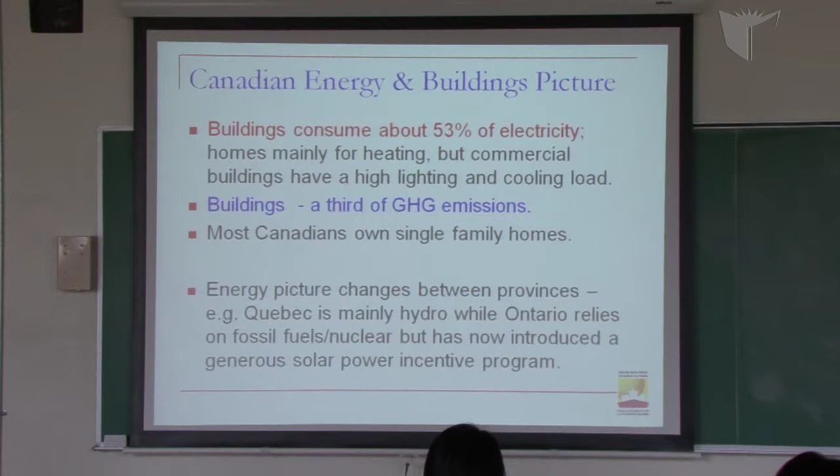When you come up with a new technology, most of the time it is expensive. For it to become cost-effective, you must go into mass production. To go into mass production, you need incentive measures. That's where the government comes in, and the schools and the education aspect to inform the public.

This shows you some of the breakdown of the energy consumption of a typical conventional home, close to 40,000 kilowatt hours per year. Do you know what a kilowatt hour is? Let me see. How many know what a kilowatt hour is? How many don't know?

How many know the difference between energy and power? How many don't know? Okay, that's fine, I'll explain in a very simple way.

Power is instantaneous energy flow, the rate of energy flow. So if I say I have a 50-watt light bulb, it means there is 50 joules per second flowing through that bulb. Some of that energy becomes light, most of it becomes heat.

So if you integrate... those of you that have done integration, have you done integration? Yes? Some of you, okay.

Now, if you plot a power curve and find the area under the curve, that's kilowatt hours. So kilowatt is the unit of power; 1 kilowatt times 1 hour is 1 kilowatt hour. If you have an energy flow of 1 kilowatt over a period of 1 hour, you get 1 kilowatt hour. That's the energy consumed, and you can also express it in joules by multiplying by 3,600 seconds instead of 1 hour.

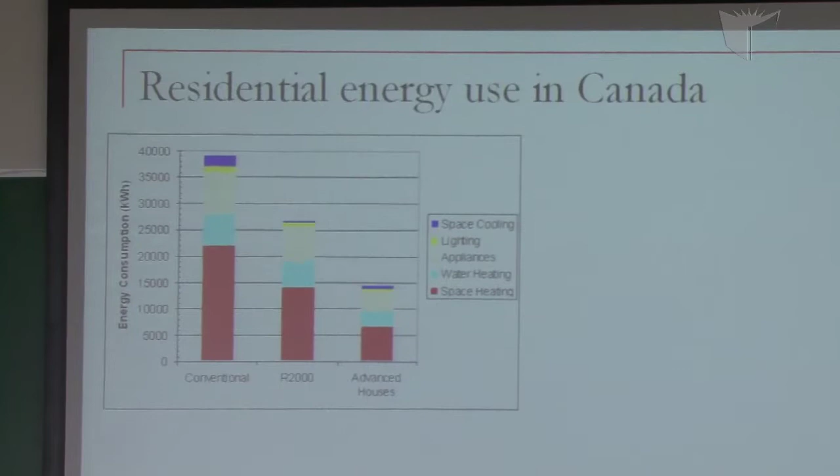There was a program called R2000 by the government to encourage higher insulation levels in houses and adoption of better windows to reduce energy consumption. That was the R2000 program. Houses were built to that standard, and there's a similar one in Quebec called Novoclimat.

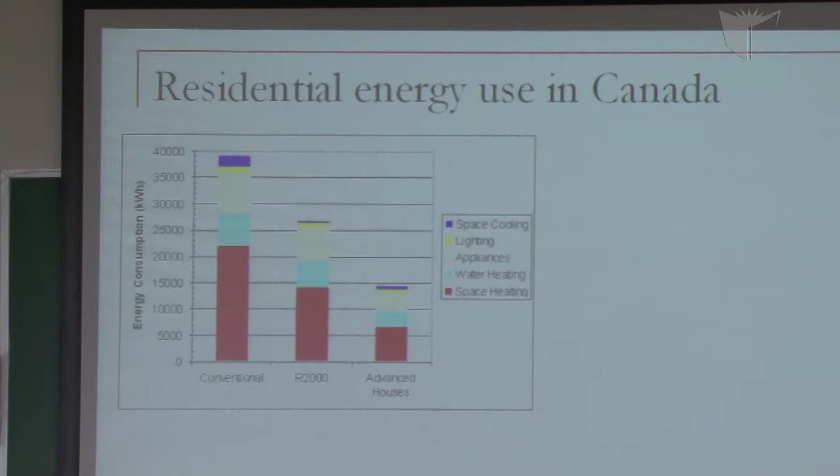Anybody heard of Novoclimat? Anybody heard of R2000? Okay, so it's good that I came here, so now you've heard about it. I guess that's one reason why I came here.

So you have these funny names, and then you have these so-called advanced houses. This was a demonstration program. When the government wants to show new technologies, they do demonstration programs, getting advanced industries and government research laboratories to build new houses with new technologies to demonstrate them. This was in the 90s.

They demonstrated that you could reduce energy consumption almost to 1/3, down to about 14,000 kilowatt hours per year.

So does anybody know how much 1 kilowatt hour costs? How much do you pay Hydro-Quebec for 1 kilowatt hour? Anybody know? Yeah, a few cents, something like 7 cents.

Let's say 10 cents. If this was 40,000 kilowatt hours and you pay 10 cents, how much would it cost a year? $4,000. So it's a significant amount of money.

That's about what you pay to go to... how much do you pay to go to Marianopolis? About that? So it's not an insignificant amount of money, and the cost of energy is rising.

So what's our objective? To bring this down to 0. If you draw a curve there, you bring it down to 0. How do you do that? By doing the kind of things these guys have done in the advanced house, but also by generating energy. So instead of just having positives, which are consumption, you have a negative, which is generation, so it becomes 0. That's the whole idea about net zero energy buildings.

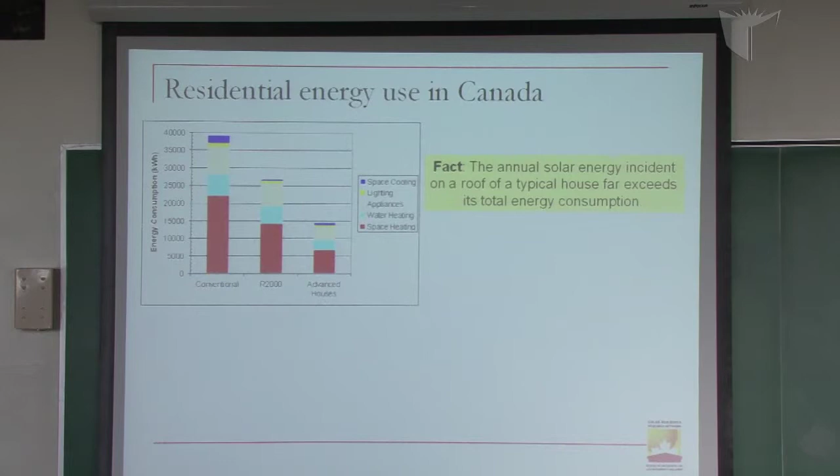Now, here's a fact: the annual solar energy incident on a roof of a typical house is a lot more than its total energy consumption. So the question is, how can we use a lot of that energy to generate electricity and heat so as to get to zero average energy consumption? That's one of the objectives of our research at Concordia and in this research network that I lead.

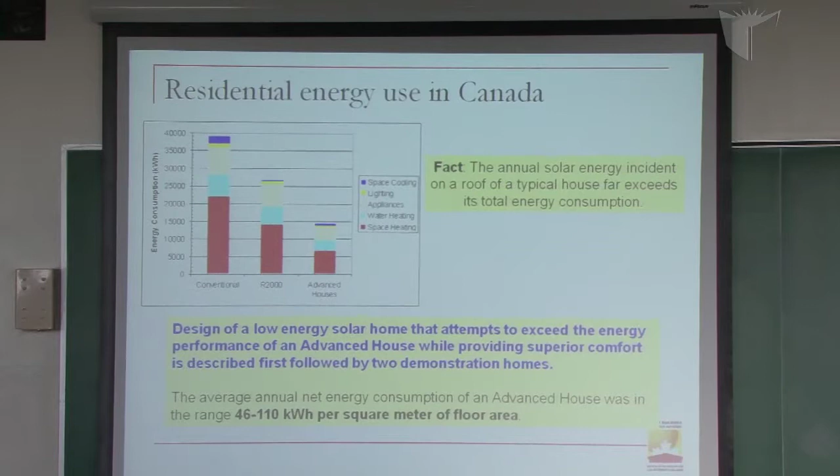The design of a low-energy solar home that attempts to exceed the energy performance of an advanced house will be described a little bit in my presentation. There are some statistics I'm going to talk about.

Now, just a little bit about our network. It's a big network: 11 universities, government labs, utilities such as Hydro-Quebec, architects, engineers, manufacturers. This is a unique Canadian initiative based at Concordia in our department.

Our long-term goal is development of the optimized solar building as an advanced integrated system. Integrated means everything fits together nicely. You don't have things which are oversized, so it becomes cost-effective. It's a combination of high-tech and low-tech. Anybody hear this word? Passive solar, passive houses?

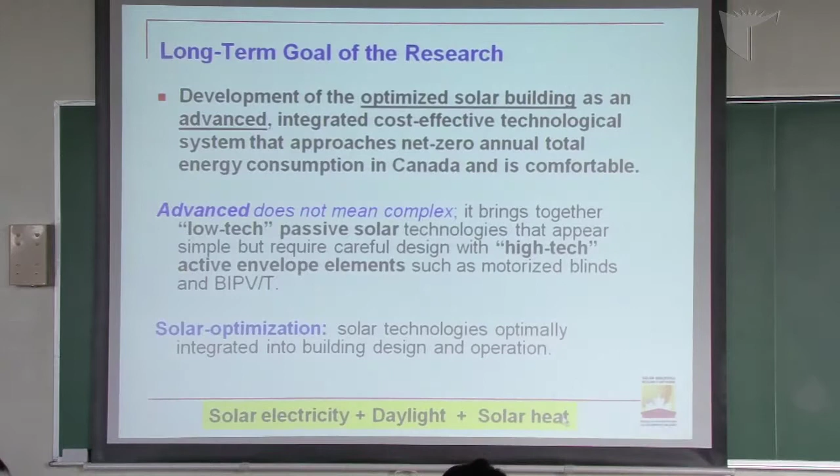Okay, so now you heard it. You'll see some pictures, so it's more optimized, more clear. Solar optimization is a key aspect. We want to use solar energy to generate electricity, daylight, and solar heat, all 3 forms of energy. You see some of our objectives there.

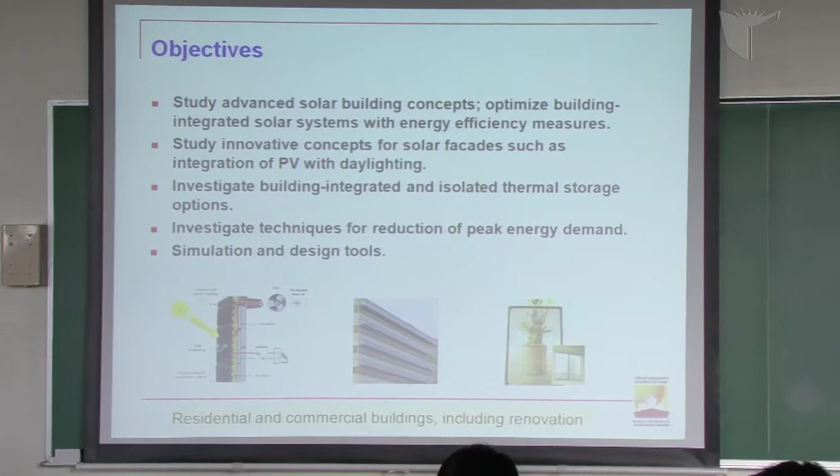Photovoltaic cells, everybody knows what photovoltaic cells are? Solar modules. So these things basically use the photovoltaic effect to convert incident solar radiation into electricity with an efficiency in the range of 10 to 20% most of the time. So the other 80% is lost. Is it lost by heat? It's lost mainly as heat.

So we try to use that heat. You'll see some of the ways we try to use that heat. You can have windows nowadays which are semi-transparent photovoltaics, so they generate electricity while transmitting daylight, so you can see through them. There are new interesting opportunities with technology that we didn't have before, and these are increasingly becoming cost-effective.

One of the things we are doing is investigating innovative design concepts for such buildings, but at the same time, we are also developing computerized simulation and design tools that engineers and architects can use to design them.

Integration is very important. Integration means using energy generating elements as integral elements of facades and roofs, so these solar panels become the outer layer of the roof or facade. They are not an add-on, they are like roof tiles, let's say. Functional integration, architectural, aesthetic are very important in what we are doing.

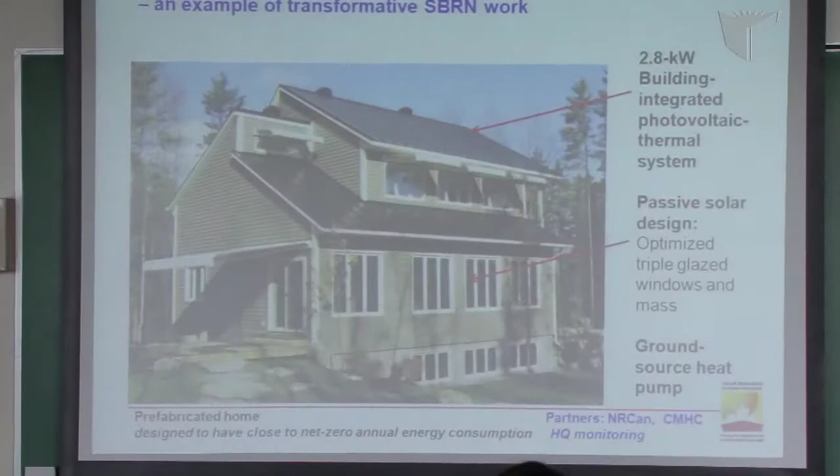Here's an example of a house that was recently built based on our design, so it incorporates research performed by my research group at Concordia. Here you see a photovoltaic system integrated into that roof surface. So it's the roof, it's hard to distinguish from the other metal roof, which is not used to generate electricity.

So that's what we mean by integration. Basically, the technology becomes very smoothly integrated into the design of the building. It becomes part of the building. And I'll talk about it a bit later.

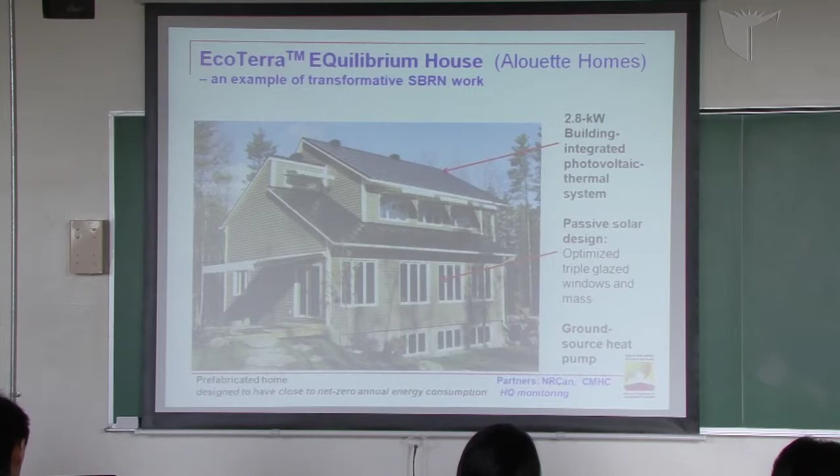Triple glazed windows - these windows that you see here are very inefficient. They are very old. In most buildings of this kind, that's the kind of windows we have. If you were to put triple glazed windows, you reduce the heat loss through them to about 1/4 of what you have there now. So that shows you how we can combine different technologies to arrive at this net zero energy consumption.

So it's south, actually close to south facing. I think you get quite a bit of sun in this room, isn't it? Gets really hot.

This can be very useful, but you need to control the solar gains. How do you control it? By having automatic motorized blinds that shut off or reflect the heat out when you don't want it and let it in when you want it. So we're talking about smart buildings that use a combination of technologies to basically come close to zero energy consumption.

So you reduce the actual consumption and you generate electricity and heat, and that's how you do it. Geothermal heat pumps are another - yes, sorry, for the windows, is there an advantage over normal windows? Yes, you reduce your heat loss a lot.

Normal windows are - they are double now. I mean, I don't know, are they single? No, I would be surprised if they're single. No, I don't think they're single, they're double. I don't think there are any more single pane windows anywhere anymore.

But there are special coatings also used to reduce infrared radiation heat loss. So there are special coatings that you don't see, which make a big difference. Can you change your existing windows, which I just bought, to move to this system, or do you have to buy a window? You mean to change the existing windows? No, you have to replace them.

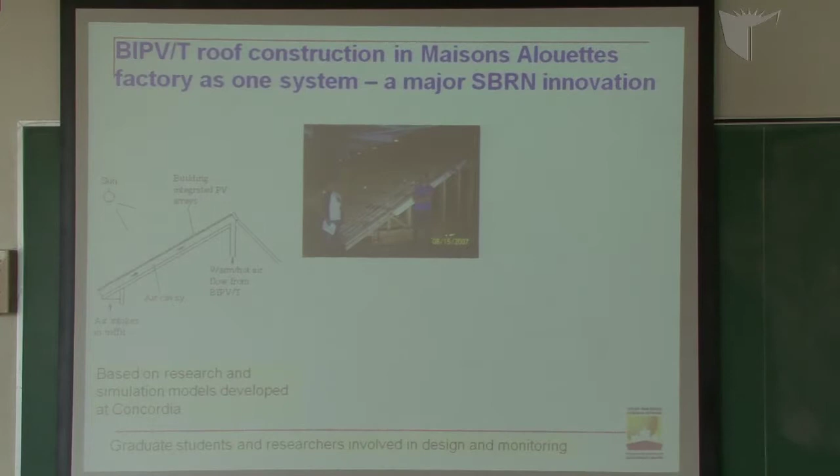So you see some of the work that we did in collaboration with this company, Maisons Alouettes, who built prefabricated houses in the eastern townships. This was the first time this kind of system was developed: basically a whole roof that is built like a solar electric and solar thermal collector, all as one system in the factory. These two guys are graduate students doing their masters and PhDs with us in building engineering, and they worked on the design of the system.

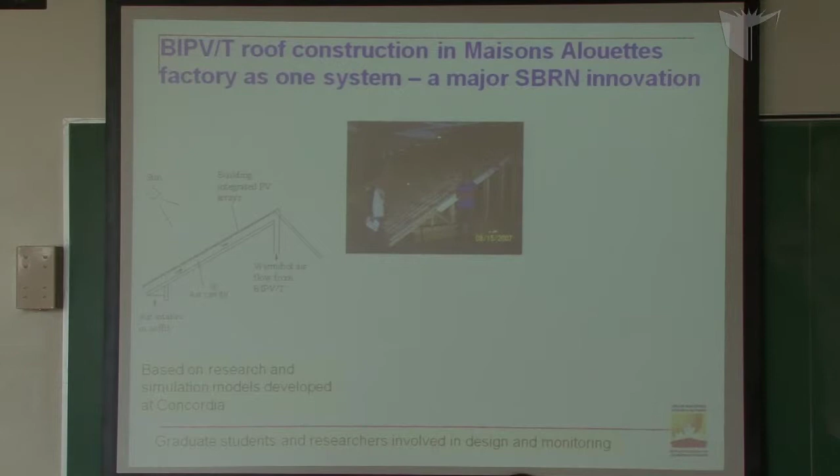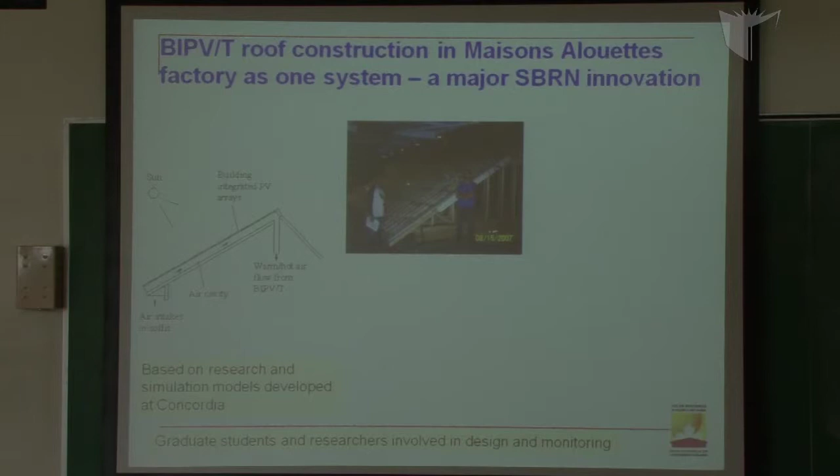You see there are intakes, so air goes under the soffits and goes through there, so we get a lot of the heat that would otherwise be lost. In addition to electricity, we generate heat. We heat the fresh air for the building, and we can use that heat to heat water. So we use the whole roof as one solar collector, basically, that generates both electricity and heat.

So this gets built in the factory and delivered to the site. These are the solar panels, basically attached with epoxy that comes with them, and they're also screwed at the top. You see these are air ducts that take the heated air, and there is spray insulation on them.

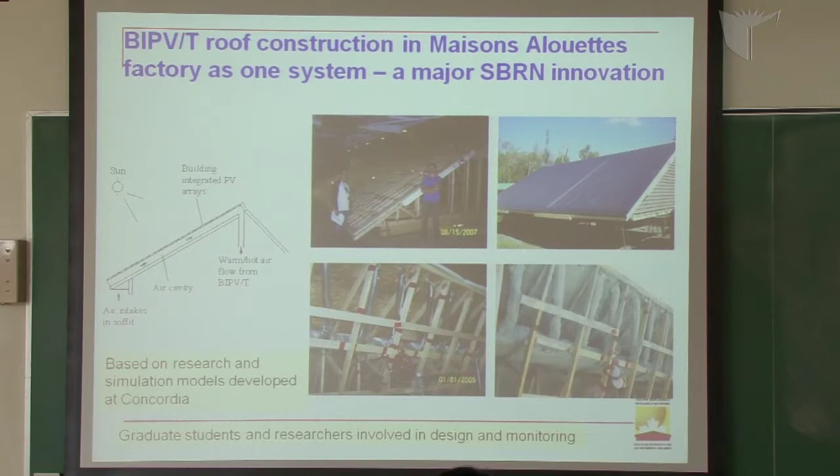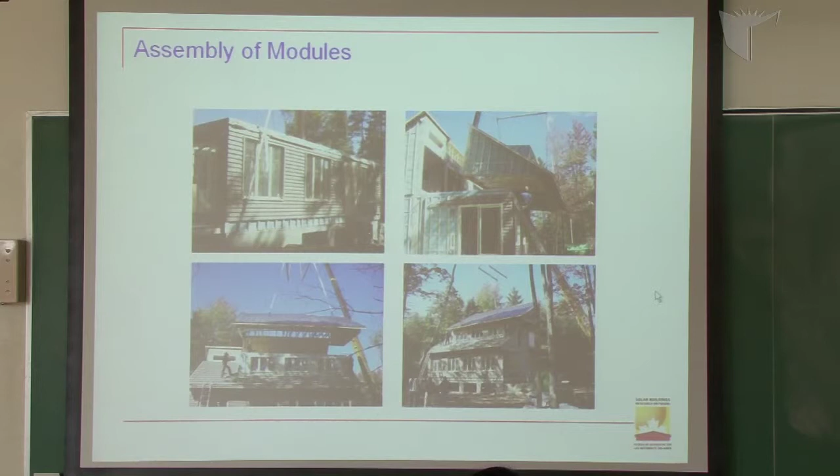You see the assembly of the modules of this house. This was done in a few hours. This is in Eastman, Quebec. So prefabrication can reduce the cost of solar technologies through integration.

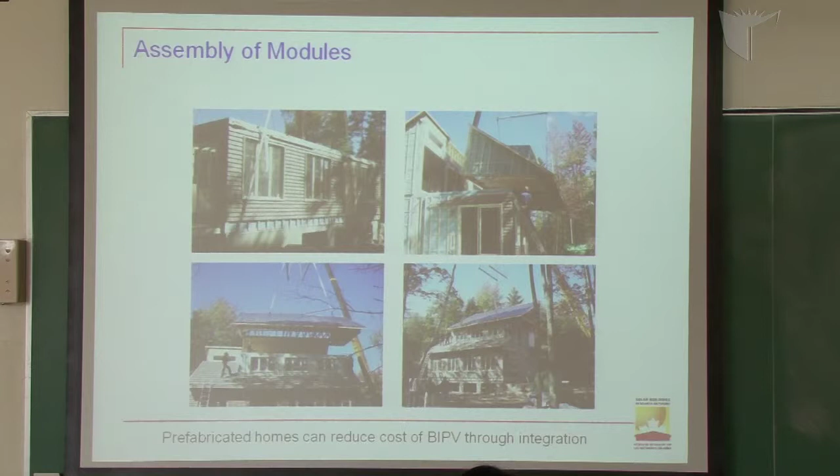Like the house we've just seen, is that something that has been done by the research group? Yes, it's a so-called demonstration project. It's a collaboration between the research group and the industry. We do the design, they build it, and we monitor its performance also. But there's no individuals who have houses of that kind? No, actually the house has been sold now, and there's somebody living in it, just recently.

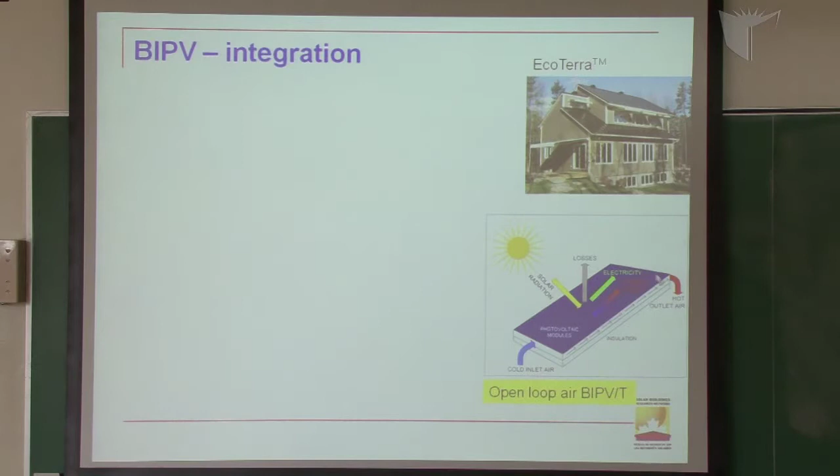Now you see the energy balance. How many of you have taken physics? I guess the first law of thermodynamics, and then this will involve some optics also.

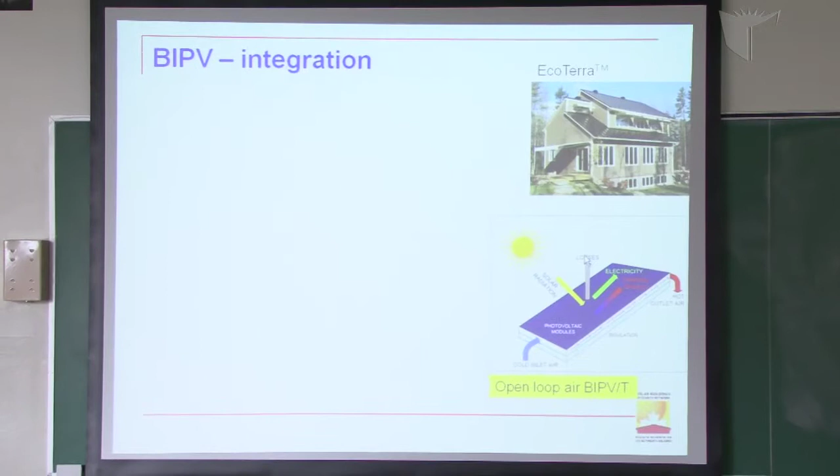So if you apply the first law of thermodynamics, if you have 1,000 watts of solar radiation, you have some reflection from there, let's say about 100 watts. Maybe you will generate 100 to 200 watts of electricity per square meter, and the rest of it would become lost as heat. By passing air from outside under that layer, we get some of that heat also, maybe half of it. So we generate both electricity and heat. That's why it's called a photovoltaic thermal system.

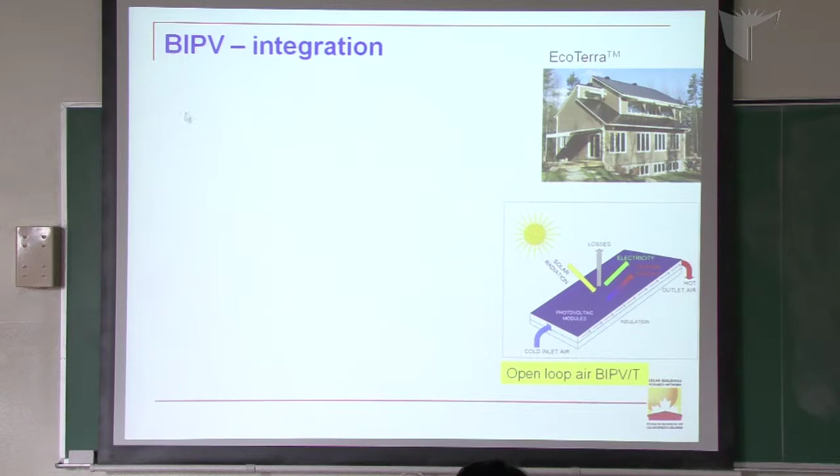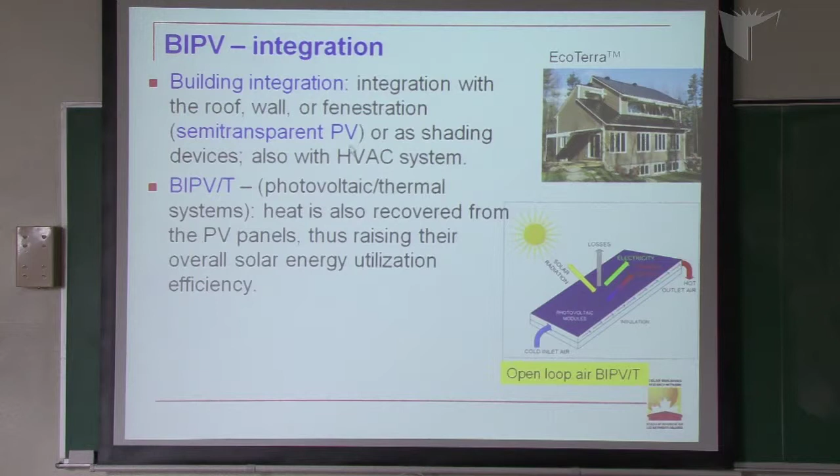BIPV stands for Building Integrated Photovoltaics. The integration is with the roof, wall, or fenestration. Fenestration windows can be semi-transparent or can be shading devices. HVAC stands for heating, ventilation, and air conditioning system. Heat recovery may be open loop with outdoor air or closed loop.

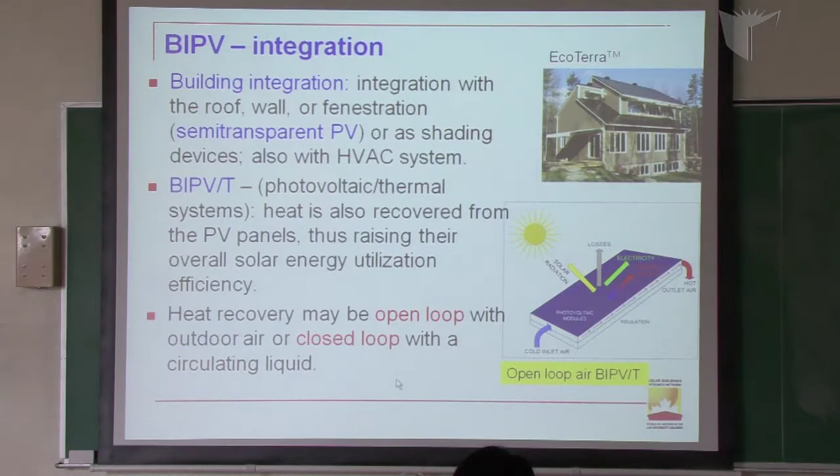Now this is a bit complicated, so I'll just show it to you very quickly. The house has passive heating, this building-integrated photovoltaic thermal system that can be used to generate electricity and heat. Some of that heat comes and goes through a hollow core slab, a concrete slab, so it hits the concrete slab, and some of that energy is stored, because you get a lot of energy when you don't need it. So you have to store it for later use.

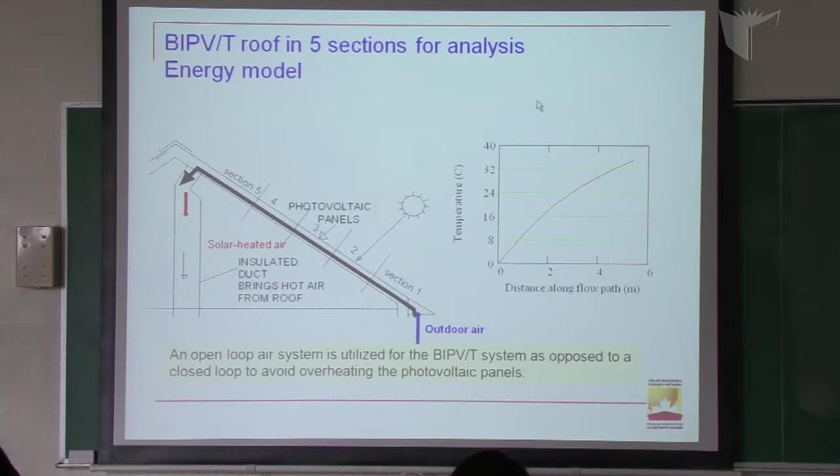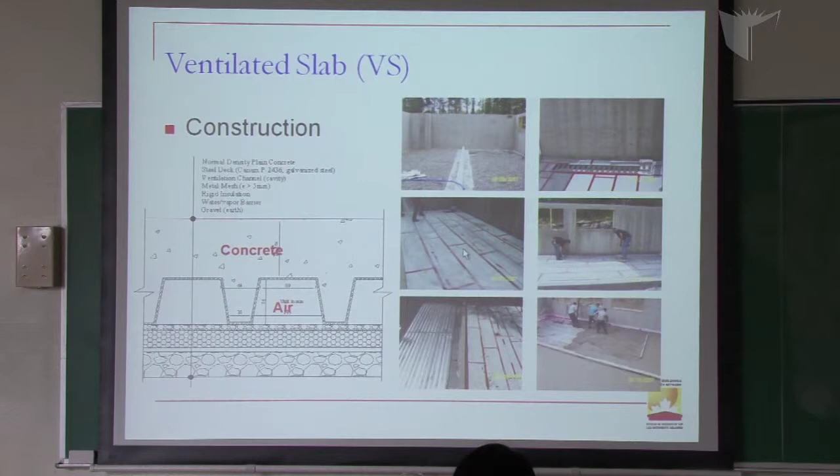Here you see some of the research that was done to do that. Another house will be even more ambitious than that one. This is the Alstonvale house in Hudson. It hasn't been finished yet, so I'm not going to show pictures from this one. You see the schematic, the basic idea. This house has quite a large photovoltaic system, and it will produce enough energy not only for its own needs, but also to charge an electric car for local transportation. So this is quite an ambitious project, and we hope that it's going to work as well as the previous one.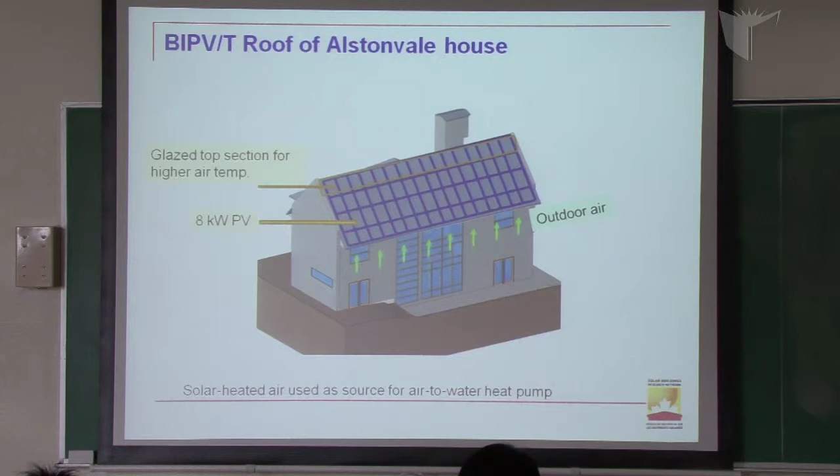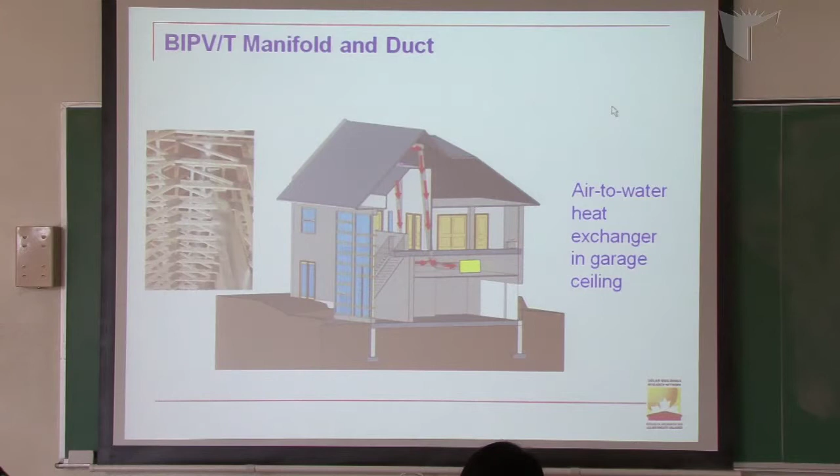You see some of the concepts. So there is air that goes under the solar panels, gets heated, and we generate a lot of useful heat, used with a heat pump. A heat pump is basically the kind of device you have in your refrigerator. So it's not a very complex device. What is complex is how to link these things together. You see some of the concepts. This is a picture from the house as it's getting built.

Design of a single-family detached house. The two-story option is usually the best because it permits higher slopes that are needed to shed snow in winter. We don't have to have a boxy design. A solar house can look nice. So very often people think, okay, I'm going to stick these ugly things on my roof. Why? You don't have to do that.

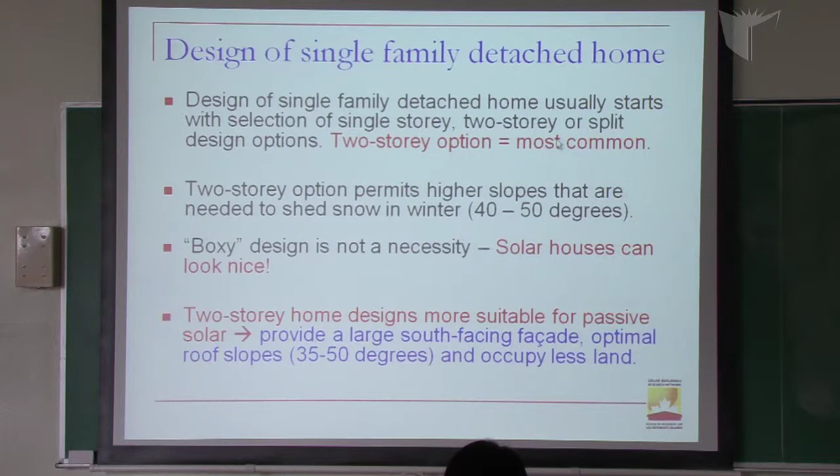You have to optimize the design of the roof and the orientation. You can have different shapes, of course. It has to be wider in the near south direction. It doesn't have to be exact south facing, between southeast and southwest. This shows you the solar energy incident on the roof per square meter on a clear day in March. You almost get more than 6 kilowatt-hours per square meter. So this is quite a lot of energy. If you have a roof which is 50 square meters, you have 300 kilowatt-hours. So that's a lot more energy than what you need on an average day in the house.

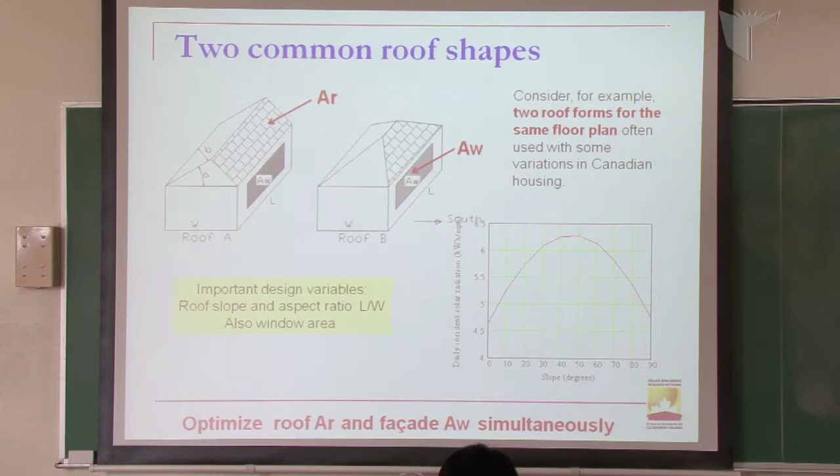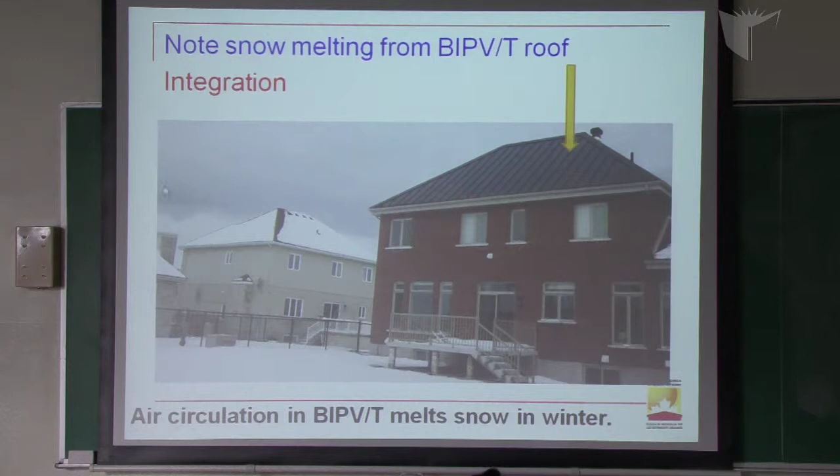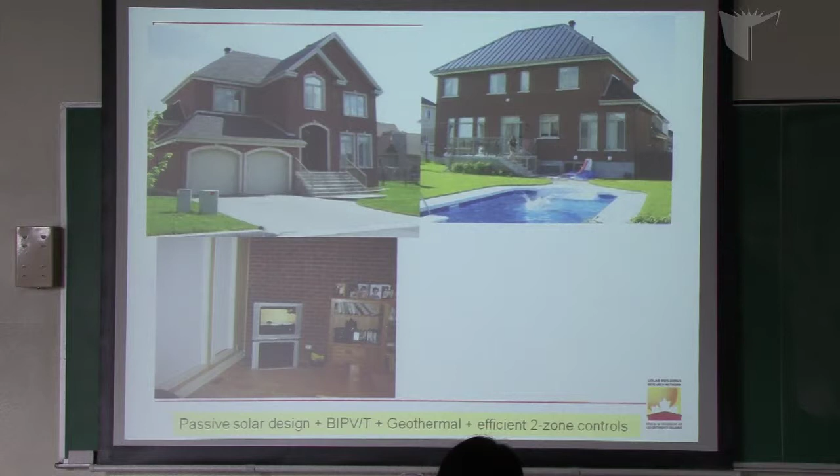So one of the things you'll notice there, apart from the pool, is a lot of south-facing window area. That makes a big difference. I didn't put triple glazing because it was a bit expensive at that time, but I still put double glazing with a low emissivity coating and an argon fill in the cavity. Those are still pretty good. Are those the ones they label Energy Star? Yes. They have to have good framing and those kinds of things. And a lot of practical details like interior brick, which stores a lot of heat, and some concrete on the floor with a radiant heating system.

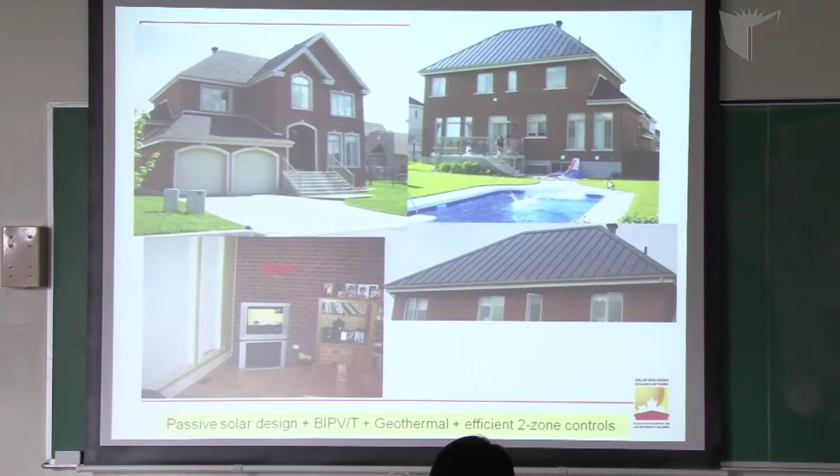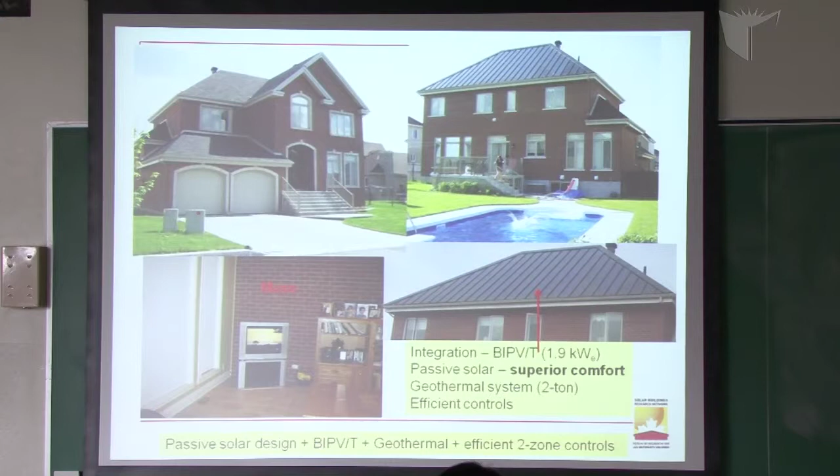So this is the main innovation in the house, this roof with the solar panels that produce both electricity and heat. Yes? I'm wondering about the geothermal power. Where does the heat come from for the geothermal? From deep down in the earth, around 400 feet. There is a loop of liquid methanol that goes down through a 400-foot double pipe, and by going down, it takes a lot of heat from the earth and then dumps it into the house. That's why it's called a heat pump.

It's like your refrigerator. It has a heat pump. It takes heat from inside the fridge and dumps it at the back. At the back of the fridge, there is a coil. If you touch it, it's hot. That's because it takes heat from inside the fridge and dumps it into the room. But that's a very small amount, so you can't heat your room with your refrigerator because it's a very small heat pump, but still a heat pump. But this is a big heat pump.

You have a big loop, 400 feet deep, that takes heat from deep down there. There is so much soil there, you can't freeze it. If you operate this continuously, you could potentially freeze it, but it's very hard to do that because you go quite deep. And the temperature deep down there doesn't change very much. It's about 6 to 9 degrees throughout the year.

Our soil here, the top of the soil, it's usually the top 5 feet that freeze. And not even the top 5, maybe top 3 feet. So you have central air circulating in your house? Yes.

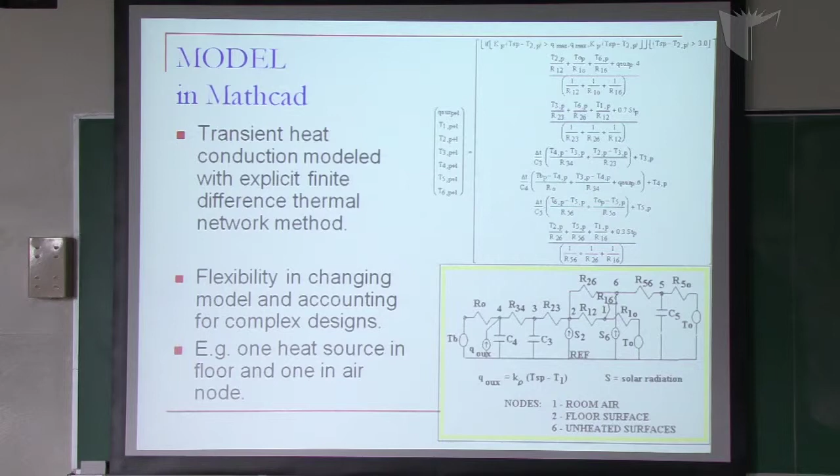One of the questions when you are designing these types of houses is the window type, of course, and how much insulation to put. Here is some of the research we are doing. This is mathematical modeling. It's like an electric network, but this is a thermal network. You find where the heat is going. So this is a lot of what we do in our research, basically quite a bit of math and physics, and of course applied to engineering. So these are the kind of things that you would do in our program in building engineering. A lot of the results of the simulations.

Do you know this program, Mathcad? Yeah? You do? You have it? No. Okay. There is another one called MATLAB. All these are very similar.

You see the kind of results of the analysis. We try to calculate the temperature in the room as a function of the weather variables. So we can predict the indoor conditions using mathematical modeling. So math and physics, basically. Thermodynamics. This is outside temperature from -15 to -5 on a clear day in February. And this is the room temperature. And with floor heating, this is the floor temperature.

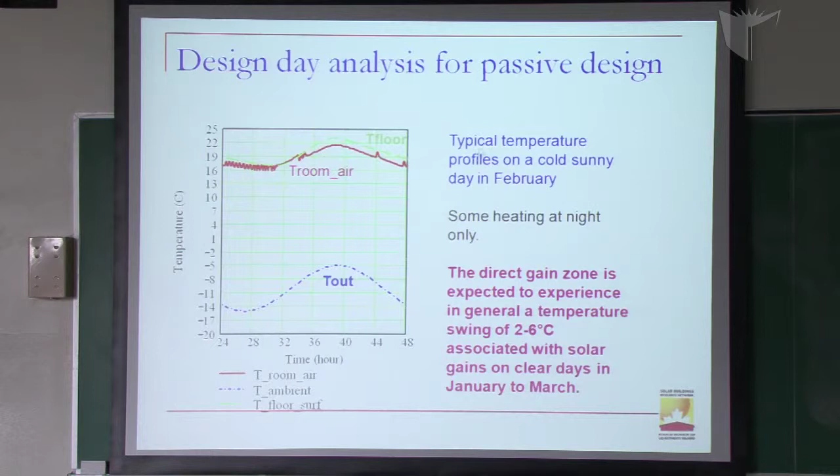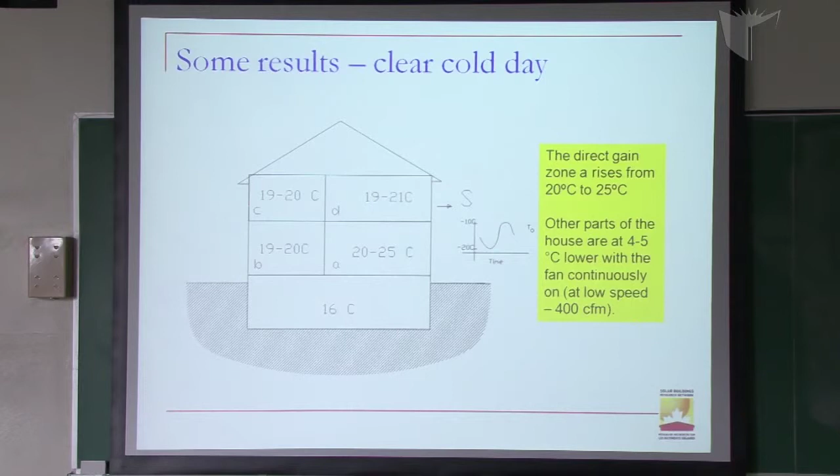Now, this is a typical output from my photovoltaic system. So this is the time, and this is the AC and DC power produced. So it's about 2 kilowatts. The area under the curve is about 12 kilowatt hours. So if you integrate the area under the curve, you find the total energy produced. The instantaneous value at any point is the power, the kilowatts. Actually, watts in that graph. 2,000 watts is, of course, 2 kilowatts.

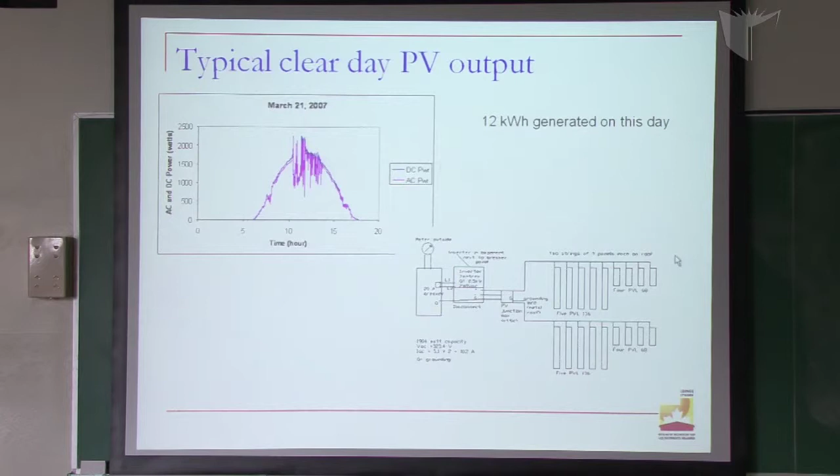And you produce DC power, and then through an inverter, you change it to AC power. That's a bit complex there, so maybe I'll talk to you at university. So 12 kilowatt hours on this day. We generated 12 kilowatt hours. This was March 21st in 2007.

So anyway, that was a trick that we used to convince the university to do this innovative system. We said it's the back facade, you know. Even if somebody makes a mistake, it's the back. But now it has become the front, because it's the most interesting side.

So we have this innovative photovoltaic thermal system. It's the most unique in Canada, actually, of its kind, and actually the first of its kind in the world. So close to 300 square meters. And it generates electricity and heats fresh air for the building, about 1/3 of the fresh air for the building. So this is a new building that was just finished.

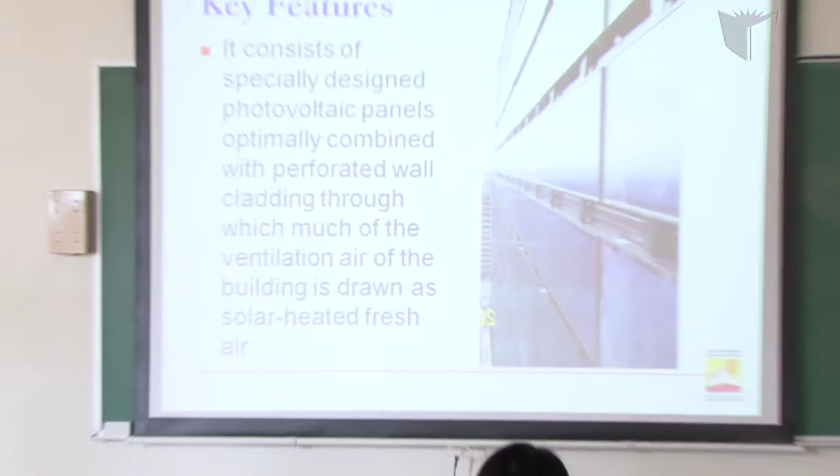So we have specially designed solar panels, special brackets. There is a perforated cladding there. The fresh air of the building flows behind these panels. It gets heated, and then it goes into the heating and ventilation system of the building. So essentially from one building surface with an area of about 300 square meters, we generate both solar electricity up to 25,000 watts and solar heat up to 75 kilowatts of ventilation, fresh air heating.

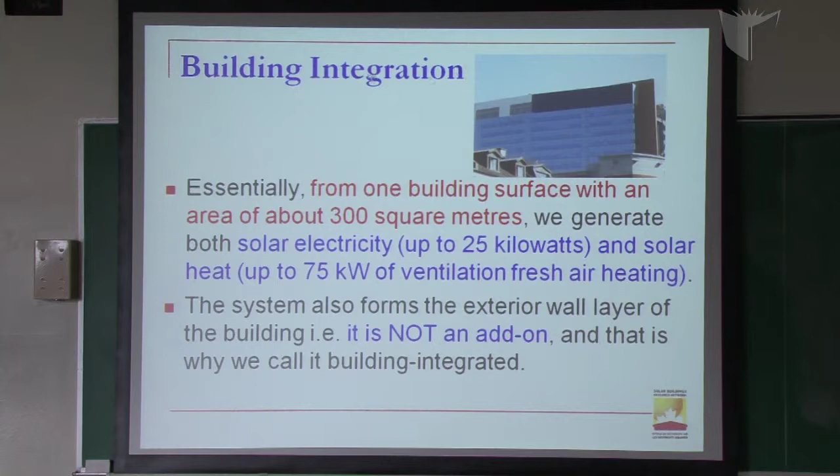And the system also forms the exterior wall layer of the building. So it is not an add-on, it is part of the building. It's like the windows. You see some of the concepts there. The outside air is sucked in and gets heated, and the electricity generated as DC becomes AC through an inverter.

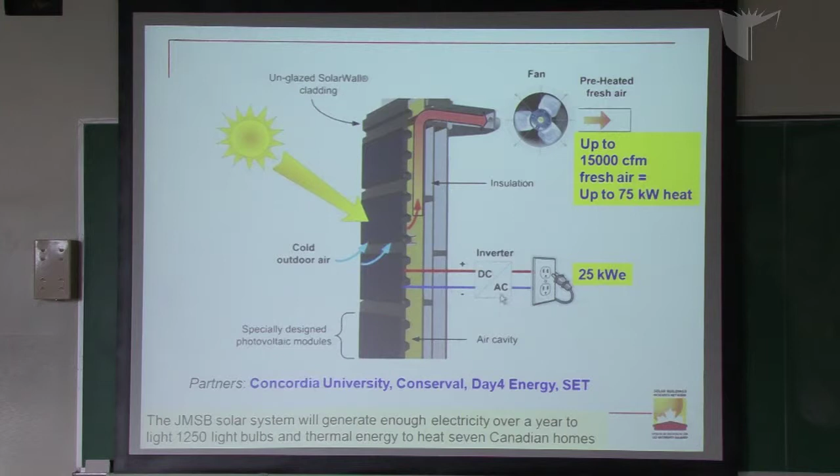Some of the airflow paths. Again, a summary here. So this PV thermal system is then fully integrated, and the mechanical room of the building is directly behind it. So that means the fresh air, which is heated air, goes into the main ventilation system. If it needs any more heating, it's heated there, and then it goes to the rest of the building. So this is what we mean by integration.

It's an optimal orientation. It faces in a good direction, close to south facing, so you get a lot of sun. In the winter, the sun is low, so you get a lot of sun on this facade, so it generates more heat and electricity at that time. At other times, the electricity is more important, but this is really about making this an integral part of the building design.

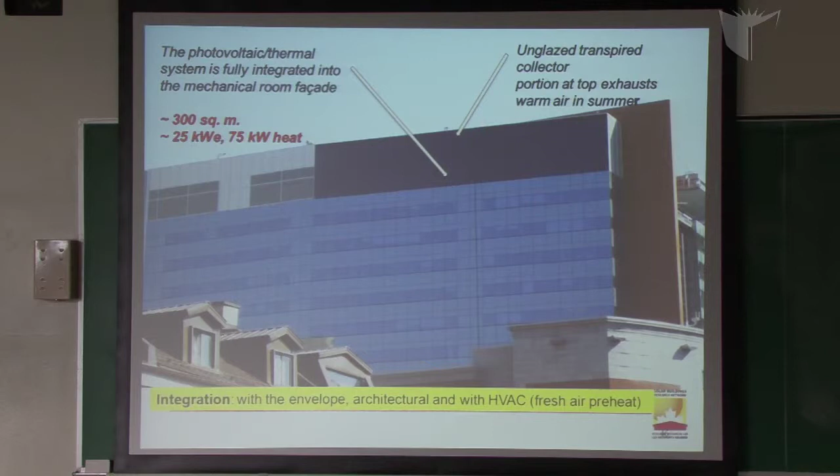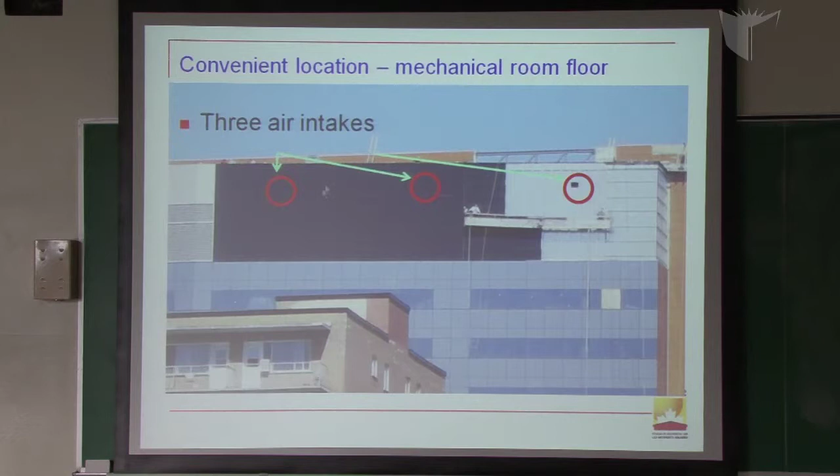You see some pictures there, the mechanical room directly behind it, the installation steps, the holes there for taking the heat. You see a close-up there of the basic concept, the PV panel layout. Now this is very technical, so I'm going to go through it quickly. If you go into electrical engineering or even our building engineering, you'll learn a lot more about this.

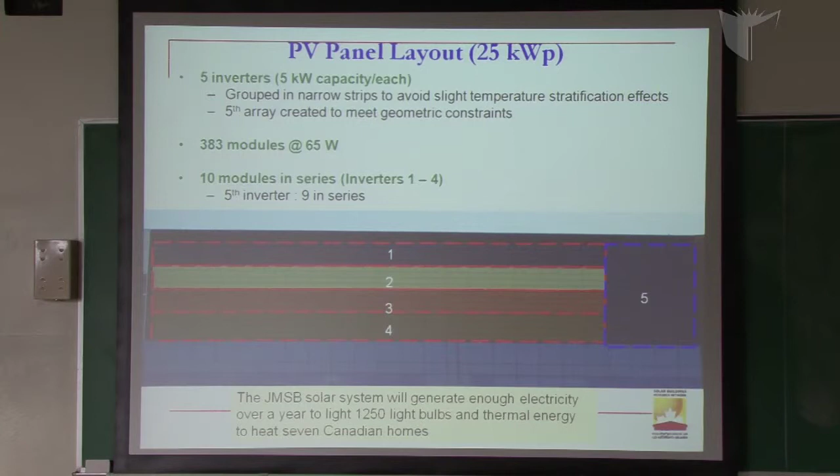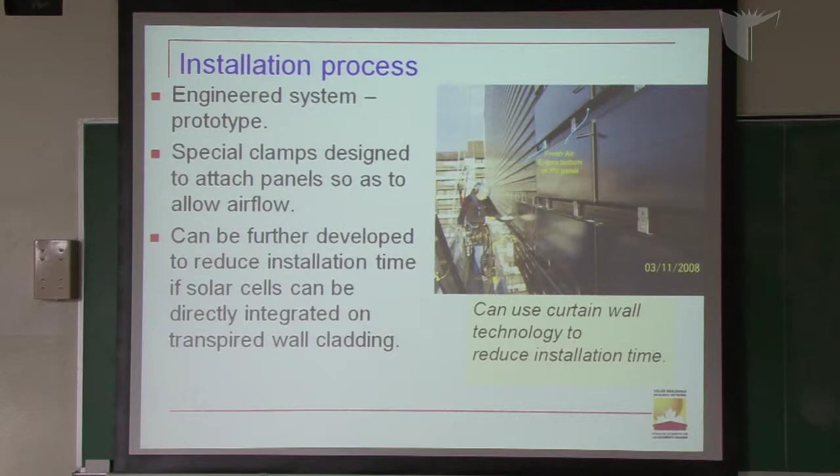You see some of the installation steps. It's an engineered system. We can reduce the cost by adopting some techniques of prefabrication again, build all of these things in the factory as wall sections and come and put them together by crane. So you see the picture from the, so this is the engineering building and this is the business building, the John Molson School of Business.

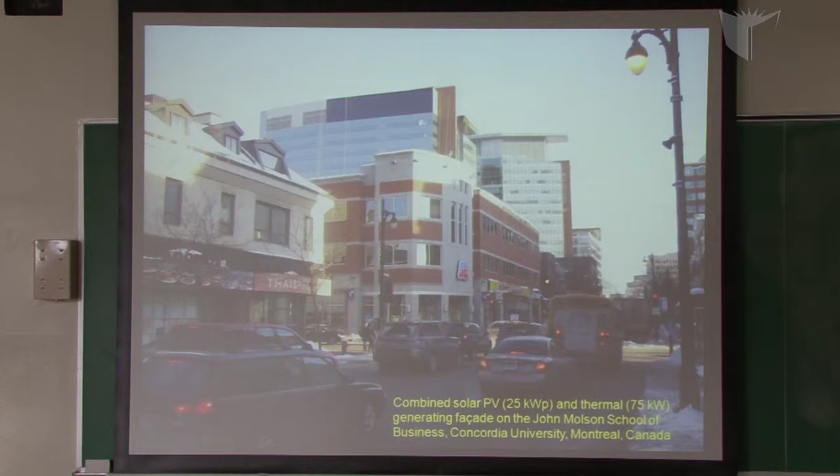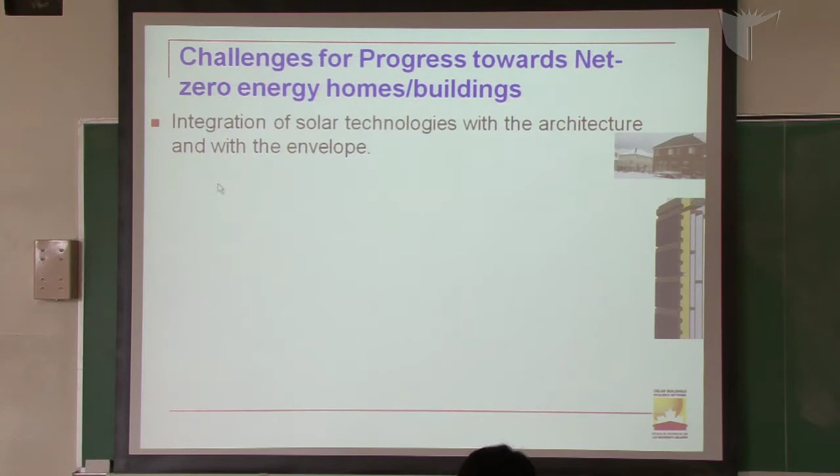Now, my last slide. What are the challenges to achieve this? Integration of solar technologies with the architecture and with the envelope. Optimization and integration again. Thermal storage, passive solar design. Integrated control to reduce peak loads, the peak demand for electricity, to reduce the need for building more power plants. So it's not just coming to zero energy consumption. We want to reduce the need to build more power plants.

Education of architects and engineers. This is one major challenge. That's why we have developed our unique building engineering program at Concordia. And of course, it's going through an evolution now. It's changing as a result of our research. The first things that change are usually the graduate programs, the doctoral and the master's. And then that goes down to the undergraduate program.

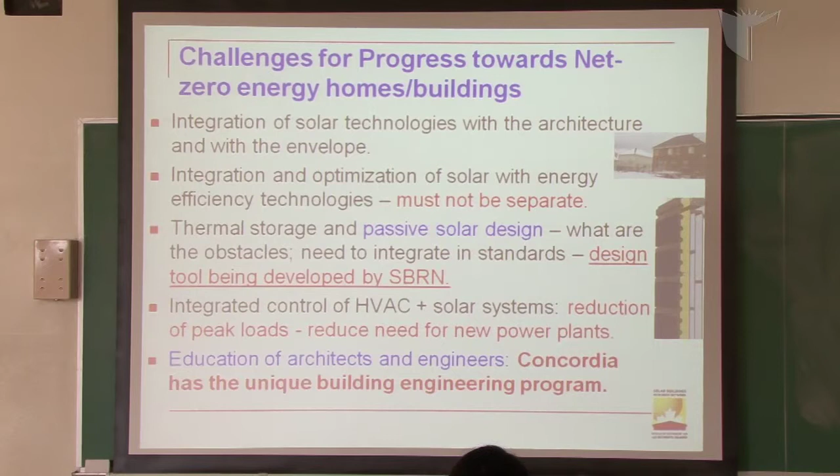So this is what I will leave you with to think about. There are a lot of things happening, new technologies, some exciting stuff coming out that can basically turn buildings into zero energy consumers, reducing greenhouse gas emissions potentially by 30 to 40%. If you produce enough energy for an electric car, then you go even further. So at this point, I'm going to stop and answer any questions if you have any.

Yes? About the passive solar design, why do we call it passive? Because the sun comes in, and you don't move it around with fans or pumps. It just moves around by natural means. So it doesn't really move at all? It's stationary. Like in this room, sun coming in, heats up the room, that's passive.

Yes? I'm curious about costs. You said that the house that you built has been bought by an actual family living in there and so on. It seems to me that the costs for building that must be huge. Actually, you get an increase of the cost by anything in the range of $20,000 to $50,000 on top of a usual house. Like if you put a very good swimming pool, it will cost about $20,000. So it's of that range of magnitude. Think of a swimming pool or a good kitchen. So that's the kind of magnitude you are talking about.